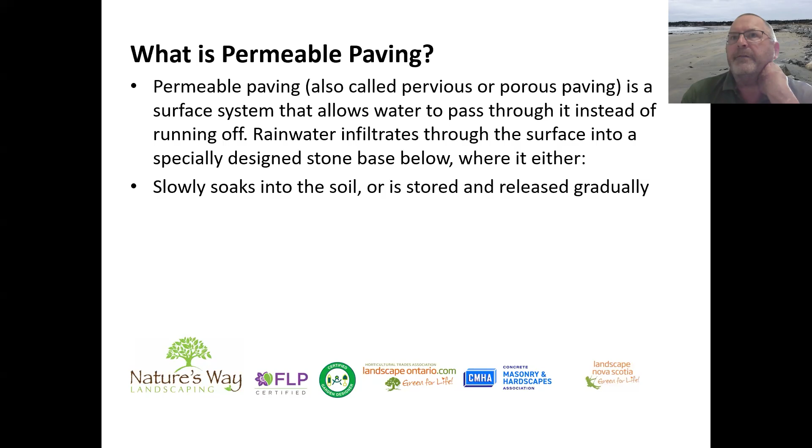So permeable paving is very technical, very abstract, very individual. There are certain rules because everything's governed by physics, but it's also something that can be experimented with, and we experiment all the time with permeable paving.

Permeable interlocking concrete pavers - I teach this for the Concrete Masonry & Hardscapes Association, the old ICPI. It's the most common in residential and commercial landscapes. As it says, it replaces traditional interlock. It can be used on parking lots, walkways, driveways, patios, ground level raised patios. It's very easy to incorporate PICP into your designs. It's durable and easy to repair.

There's no difference between the units classified as permeable versus regular interlock. The units are exactly the same; the difference is whether they have spacer bars on them. The designated permeable pavers have a bigger bar, so the gap is wider. And it's that gap that dictates the infiltration rate of water going through between the pavers. Your jointing material between those pavers will also affect that infiltration rate.

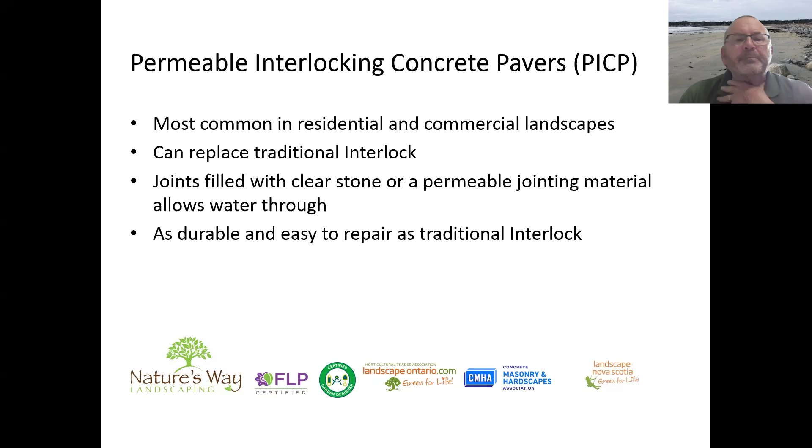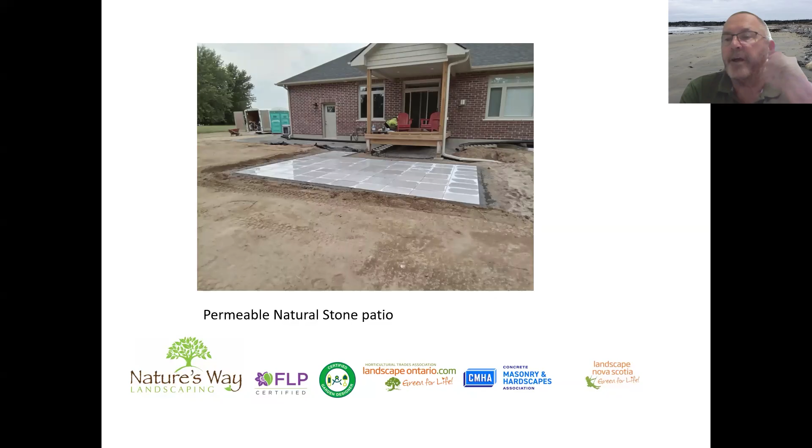So this patio looks just like a traditional patio. We had the nitro in there as the jointing material, so it's a full infiltration project, but it doesn't look like what everyone would think of as a permeable patio.

Barry, there's a question that asks, is there a jointing material you would recommend? Is there an edging material I'd recommend? A jointing material that you would recommend? Jointing - it depends on the application.

Out of the two that I mentioned, the Romex and the Gator, I've only used Gator. It works great, but it's very expensive, and the Romex is very expensive too. We've used number 9 or 1/4-inch chip a lot of times, and it's a lot less expensive, but it's also not as attractive.

I have it at home, so you get little bits of limestone laying on your pavers after you've weeded, that type of thing. So the maintenance is a little bit more because with the clean stone you will get weeds germinating. It's hard for weeds to germinate with the Gator and Romex products, so it's much easier to keep clean. But again, it depends on the application.

So this screen here is just a regular large slab on a full infiltration base. Again, we use the nitro in there for the jointing material, so the water just flows right through. This is actually where I'm taking the picture - behind me is Lake Ontario, or the St. Lawrence River, so the water just goes right down and back into the river.

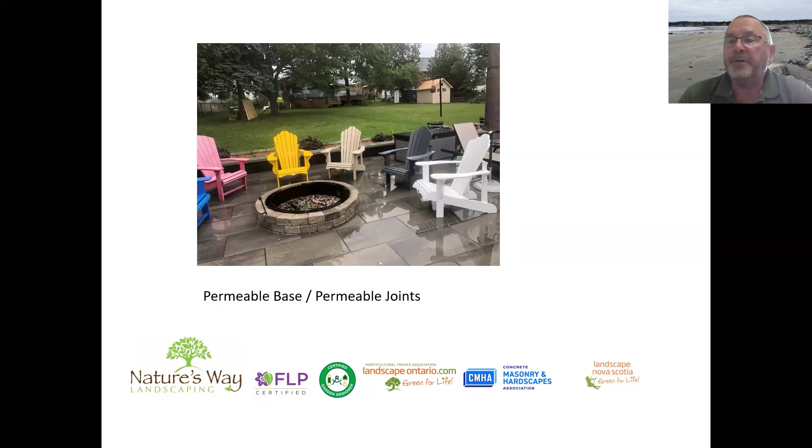What base did you set that on? It's on either 3/4-inch or 7/8 clean limestone. Okay, so it's a clear base - there's no fines in it.

This one - just as an aside, we did a little patio behind this house. The St. Lawrence River is behind this house, it's a different property, and again it's a full permeable patio. It's about 30 feet long, 5 feet deep. It's flagstone, again, with a permeable jointing material between the slabs.

So when the water washes up, it just goes right back into the river, because with the height of the water right now, it is lapping over. The client knows that where there may be an issue is that the jointing material may get washed out. Flagstone won't go anywhere, but it may need to be reapplied.

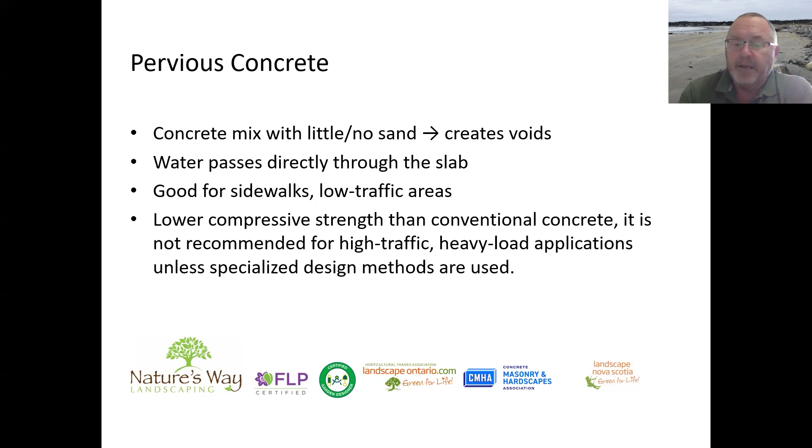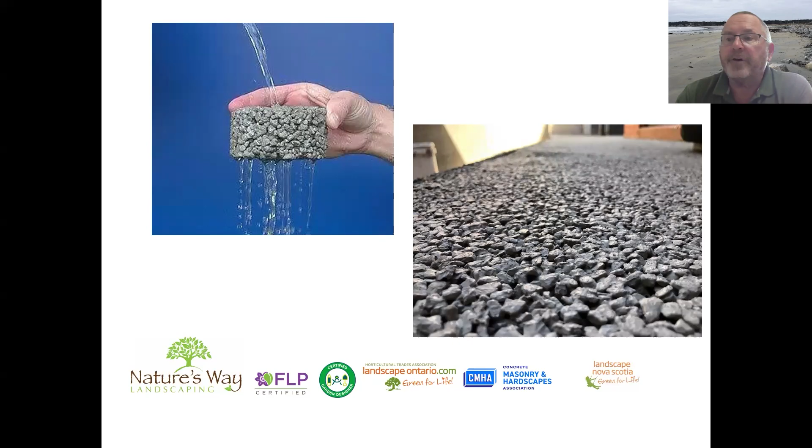Porous asphalt is very similar - there's a lot less of the fines, a lot less of the binding material, the tar that binds everything together. That's because you have to remove something to allow for that movement of water through.

So when we replace a traditional base with clean stone, like a 7/8 clean stone, we've removed everything underneath that size. If you're looking at granular A and put it through a sieve, as the mesh gets finer you'll have less and less material going through until you get down to the fines. When all those materials are put together and you compact granular A, it's almost waterproof - it will shed water quicker than it allows it through. So we take all those fines of different sizes out, and allow the water to go right through the base.

They have to do the same with porous asphalt, because with porous asphalt and porous concrete, the water isn't going through joints. With interlock, with permeable interlock as I said earlier, the stones are exactly the same - same compressive strength and everything else. It's the joints that allow the water through, so to increase your infiltration rate you have a wider joint and a more open graded jointing material.

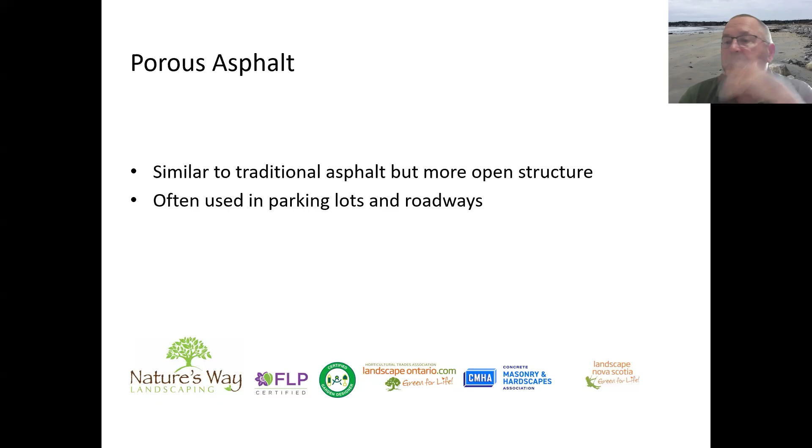It depends on where you are and how you're doing it. I don't like to use product placement, but there's a triaxial grid made by Unilock. You can get a regular triaxial grid as well, it's just easier for us to get it from Unilock. That allows you to put about an 8-inch base in a driveway.

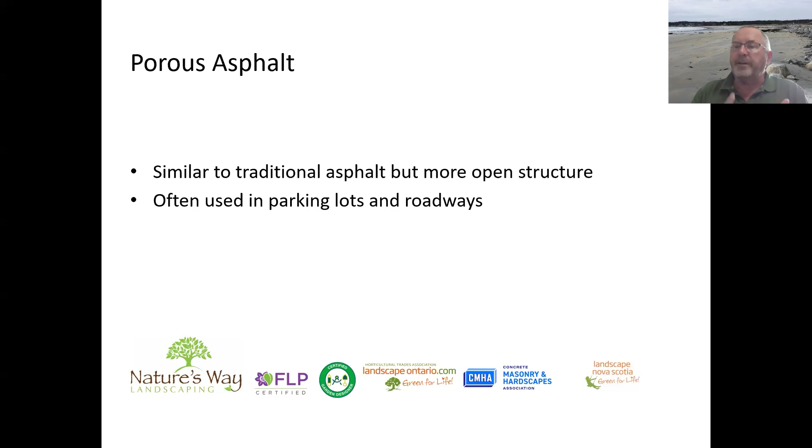What the triaxial grid does is stop a lot of the depressions and movement of anything that you get with your traditional base. Normally we'd do anywhere from a 12 to an 18-inch, maybe deeper base for a driveway. We'll spend the extra money and get a triaxial grid on there, and then we can do it with a traditional depth of base. We'd have to do that with asphalt, concrete, or interlock. That process is exactly the same. Okay, perfect, thank you.

This is basically the base layer, and then you put another layer of asphalt on top, which only has stone dust in it and the bindings, so it's a much smoother finish. Although it wasn't porous asphalt or pervious asphalt, it looked like that, so all you see are the big stones. It just, I'm sorry, but it just doesn't look right.

And when you consider that what we're doing is just making a place for people to live so much nicer, so much more practical - there's no way you can do any repairs here with either of these. If there's a problem with a water pipe underneath, you have to cut it. You can't lift some pavers, do your excavation, and put everything back complete.

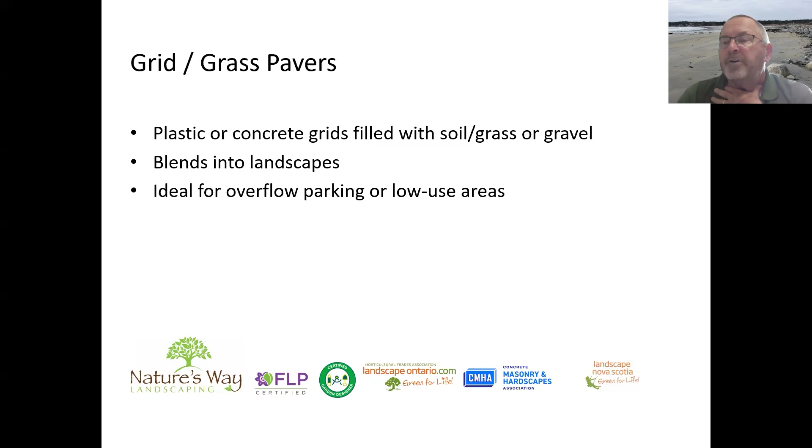So these do work. I have some friends that have put in the big concrete box with the void and planted it - they've had no issue when it's used occasionally and it's irrigated. They've got projects that aren't irrigated and the grass doesn't grow very well. If it's partial shade, or especially afternoon shade, you'll get much better growth of grass, because that concrete will absorb the heat from the sun and bake the soil, and your grass won't grow very well. But again, it's used for low use areas, overflow parking, shaded areas. It's another tool in the toolbox for us to use.

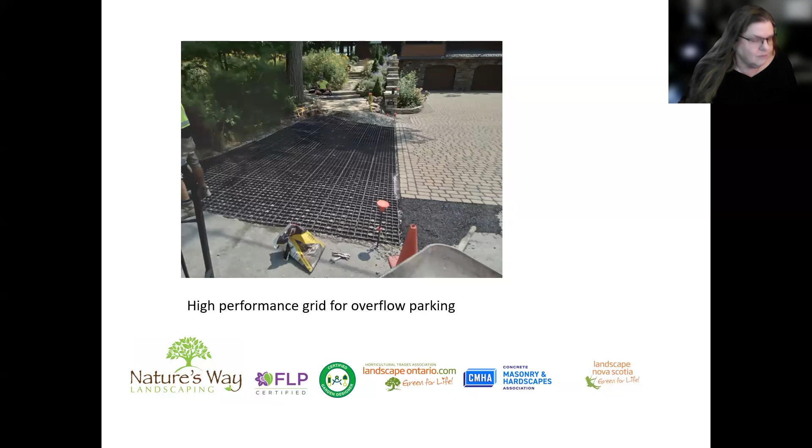Terry, can you tell me what grid system that was? Sorry, it's hard to find a good grid. I believe that was Unilock - I think Unilock have a grid. So I believe that was theirs. Thank you, it's hard to find a good grid system.

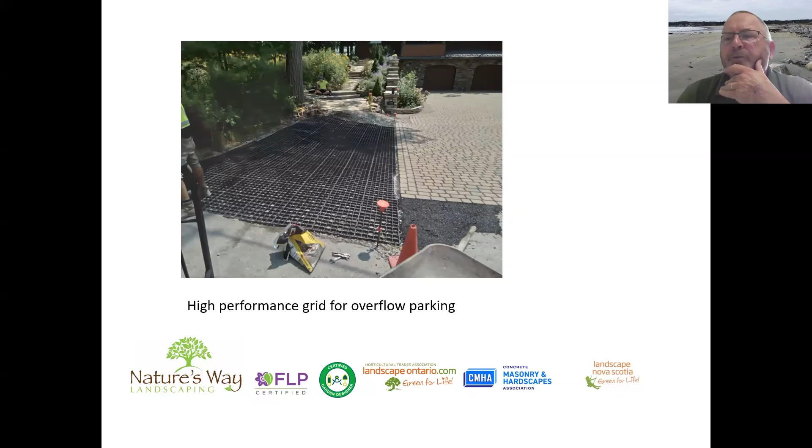Paul Dornbosch from Thornbush uses the one from Han Plastics. Okay. And I forget the name of it, but I know he's used it on a couple of quite large projects and been happy with it. Yeah. Okay, thank you. So again, these are pictures stolen from, I think, Deco Block.

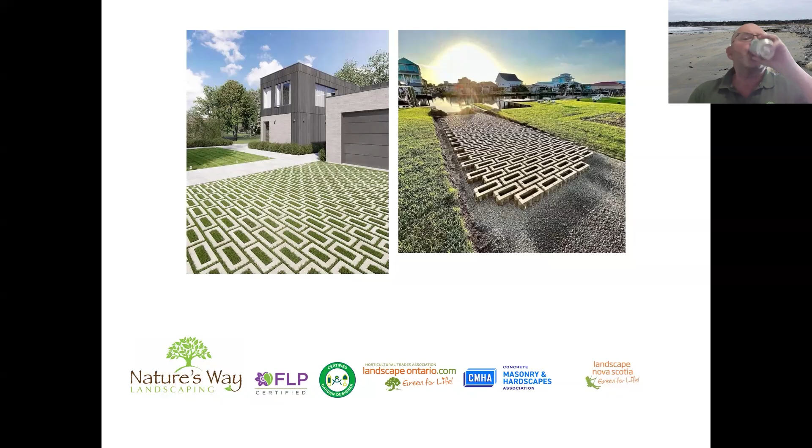I really do like that house. And again, this is a permeable option. To make it permeable, it has to be on a gravel base. And then you put the soil in and you put the grass in. So you are limiting the ability for the grass to grow correctly. But again, if you set it up right, you're good to go.

Theoretically, the grass in this could be synthetic. You would remain permeable. It would be finicky, but it's possible. So again, as long as you know the principles, experiment. Can I ask how that's going to handle if you put a synthetic in there? Is it snowblower worthy, since we're all in snowblower area?

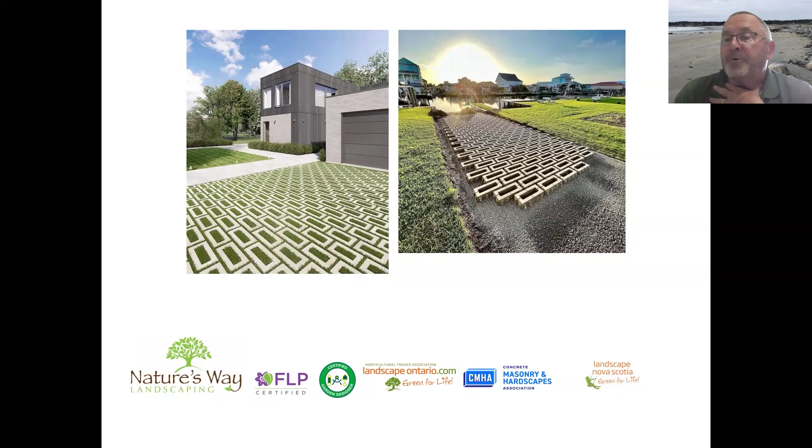It should be, because you'd have to be fastening the synthetic down. Yeah. So you'd be stapling it down anyway. Right. That's why it's finicky. Yeah. So yes, it should be snowblower friendly. Or it'll definitely be snow shovel friendly, which younger people would relish because it's good exercise.

Or you could just move somewhere where it doesn't snow, like BC.

Optional extras that aren't usually thought about: flagstone. It's again, everything that we do. We're doing a project next week. We did a patio last year, a fully permeable base, but not a top. We're doing a continuation of the walkway out to the driveway next week. And again, it'll be on a 3/4 inch or 7/8 clean limestone base with a 1/4 inch chip bedding layer.

We are putting the same stone as a patio in front of their garden shed, and it will be on granular A because we actually have to have it raised above grade. Clean stone has to be fully encased because there's nothing to stop it moving. As soon as you come above grade, you have to use the granular A. And then that way you can have the sides sloping out, that will hold it in, and then you can bring in mulch or soil or something to dress it up.

So again, it's the base that's creating the permeability. And if you look at the numbers, it is cheaper to use a permeable base, a 7/8 or a 3/4 inch clean stone base. Another option is resin bound driveways, walkways, patios. It's extremely common in the UK and it's getting more and more common almost daily because it works so well.

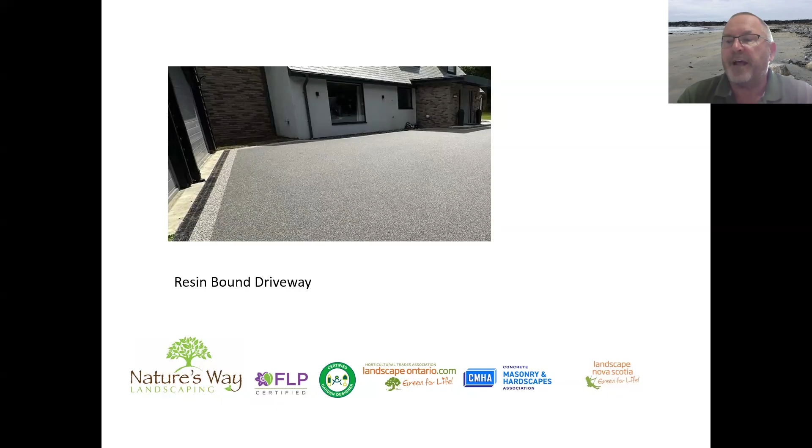So this is a resin-bound driveway from the UK. So you can see you can be really creative with it. You can have sailor or soldier course edges. You could have a different color resin. This has, I believe, a sailor course of interlock, and then there's a course of a lighter colored stone, and then the main body. So you can be creative with it, but again, my concern is its ability to withstand the frost movement.

Oh, someone just had a question about Pure Pave. About who? And I have used Pure Pave. Have you used Pure Pave before? Yeah, I think it's Pure Paver. Yes, because the paver itself is permeable. Is it Martina who's asking? Martine, are you asking about the Pure Pave? Yes, I am. Thank you. Thank you, Lexi. So, are you thinking of Pure Pave or Pure Paver?

Well, Pure Pave is this resin-bound gravel system, and apparently has been tested by the National Research Council and the University of Ottawa here in this area. But I'd like to know designer and landscaper experience apart from what they claim. Has anybody put it in? No, I haven't. So that's what Samantha would have used. It may not have been Pure Pave, but it's like a resin-bound stone. Just because something has been tested by the National Research Council doesn't mean anything, because you can pay them to test anything. But have they shown you the results? I think so. Okay. So it may work. Those would be my concerns, the frost movement.

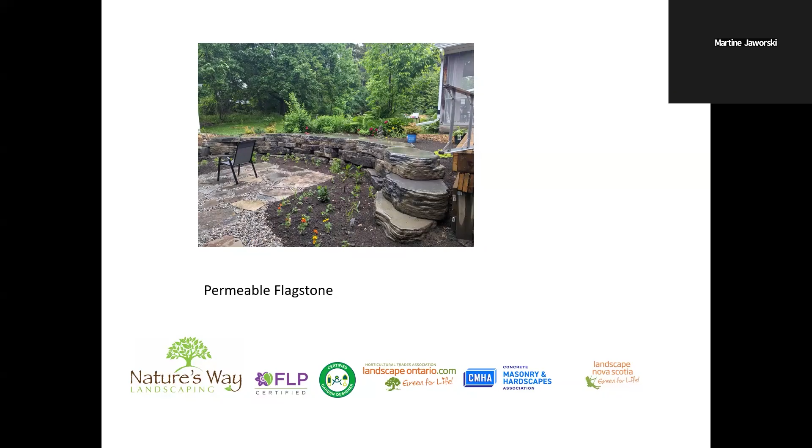But check with the supplier, the salesperson for the supplier, and find out what the Research Council said and where it was tested. They have the labs in Ottawa, and they may have tested it inside but maybe not outside, or they may have tested it outside somewhere else, because Ottawa does get some nasty frost movement. But definitely check with the supplier and see what kind of guarantee they use.

I know the first time I used Gator Base, the thin polypropylene base, it was for a 15 by 15 patio, and I was able to get a commitment that if we got movement in the first few years, they would pay me to remove it and do it the traditional way. It never moved. It still hasn't moved. Pam from Simply Landscaping has it in her back; that's what her patio's on. As far as I know, it still hasn't moved, and it's been years. But again, check with the manufacturer and see what they say. And if you have concerns, see if they can give you the reassurance that you would need.

This picture is permeable flagstone. It's only permeable because, again, it's not the materials that we use in. The flagstone itself won't let the water through, but the gaps in between. And this is just 3/4 inch clear stone as a base, we put a 10 mil bedding layer on it. We put the flagstone on, and then we put 3/4 inch river stone to provide the joints.

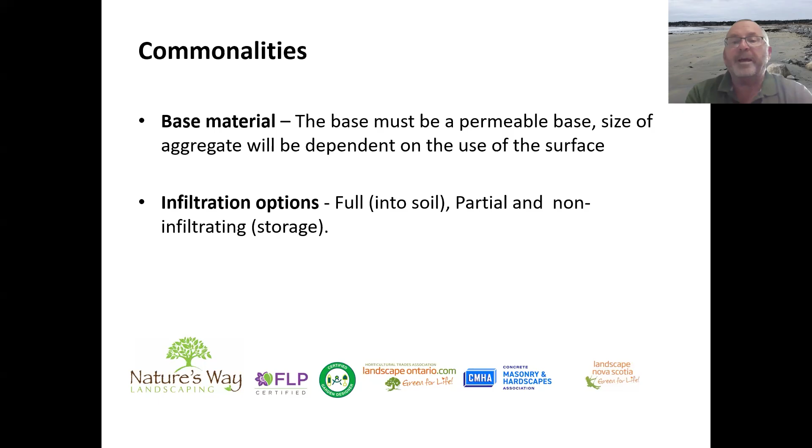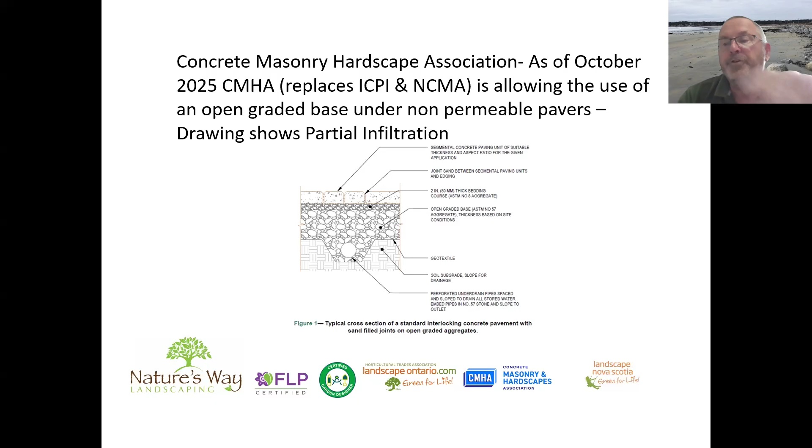Infiltration options: full infiltration, which is where any water going through the joints will actually go into the soil after it's sat in that void, which is the base. And then there's partial and non-infiltration options. So, sorry, it was October of 2025 that CMHA is allowing the use of open graded base under non-permeable pavers. And there again, they have an under drain to take any extra water out if it doesn't go into the subgrade.

This is full infiltration. So again, there's no drainage pipe in this one, and the water is just to go into the subgrade. If you're trying to infiltrate, do not compact the subbase, which is what I'm telling people to do if they're doing interlock. Compact the subbase. If you're doing infiltration, don't compact it unless you're in sand, which you can't compact anyway. But as soon as you compact that clay layer, you've just created a flower pot, and the water will not go out. We have to remember, permeable is not for everywhere.

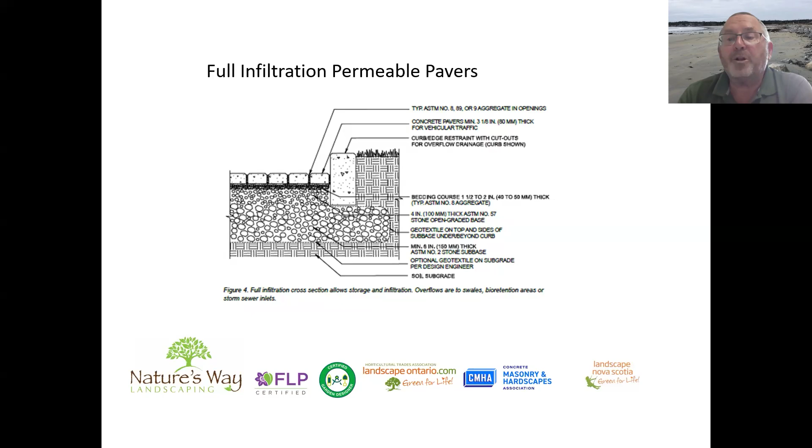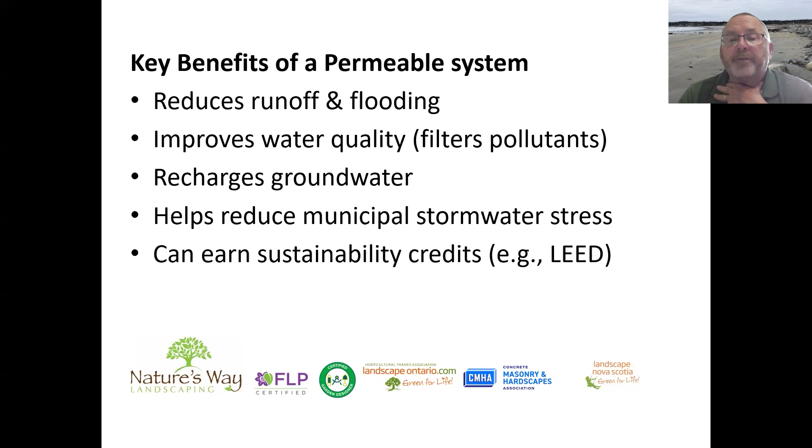So key benefits: reduces runoff and flooding, improves water quality because it really does filter pollutants. And not just what we've created, but the fact that we're putting it into our base and then it goes into the sub-base is what really improves the water quality. Recharges the groundwater, helps reduce municipal stormwater stress, and on commercial projects, you can get LEED credits. Why it matters: urban flooding issues, stormwater management, environmental protection.

There is a subdivision, I believe it's in Credit Valley Conservation area. The developer was allowed to not have a big drainage pond because he was going to put a permeable driveway on every property, which then allowed him to use that space for the stormwater pond, put more houses, which made him a ton more money even after putting in all the permeable driveways. So again, it's thinking outside the box.

It's something that when interlock was first done, it was a semi-permeable base just because it was smaller pieces of rock that were broken up before they put the bigger pieces of rock on it. So, it's not brand new, but we're adapting all the time. And as designers, the one thing that we have that a lot of other people don't have is an imagination, and it's utilizing that imagination.

So as Samantha did, she had several areas of the resin bound, and it's working in some, and it's not working in others. And when you do your designs, you work out the pros and cons of doing things. This is what we need to do with permeable. Environmental protection. What permeable pavements are doing is really making a difference in environmental protection.

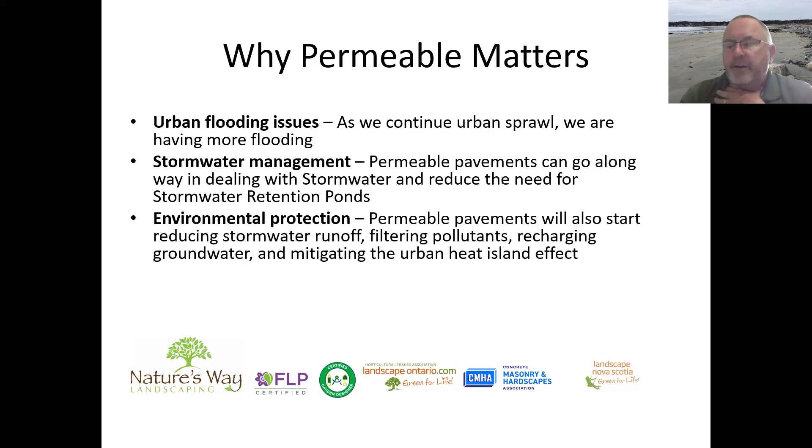Key disadvantages of permeable pavement. I forget where I got this quote from, but installation is 50 to 100% higher than conventional paving due to specialized materials. When I teach the permeable course for CMHA, I teach a commercial course. That cost, if I did a commercial project, it's probably going to be 20 to 30% higher than traditional, only because when I'm doing it, I have to keep all the materials separate.

I have to keep them clean. I have to put any of my gravels on a clean geotextile so they don't get contaminated. I can't allow any contaminated materials on top of the base. The specifications are very stringent on bringing any kind of organic material in, any kind of clay, any kind of non-pervious materials in, because they want to keep it as clean as they can.

So staging becomes more expensive, and the processing itself becomes more expensive. But that's not for what the majority of us are doing. We're doing driveways, walkways, mostly residential. And even commercial, we can do commercial if it's smaller areas where we don't have the expense you'd have in a traditional municipal permeable project, because they want to keep it as clean as possible, and we don't need to.

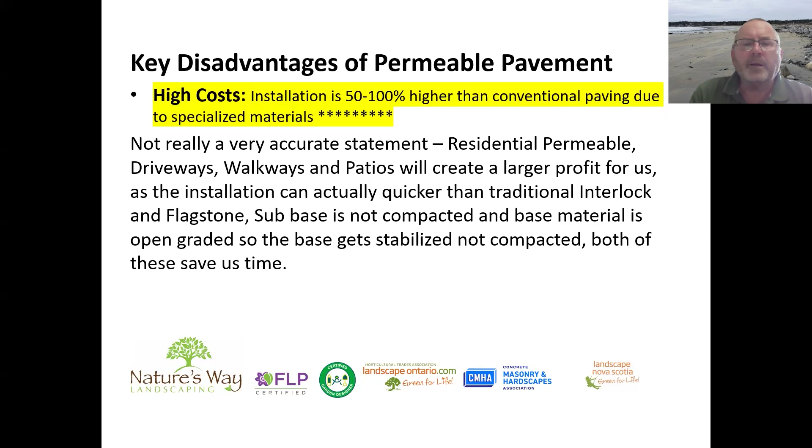Maintenance requirements of permeable pavement are quite different. It's prone to clogging, yes it is. Again, depending on how you finish it, my permeable patio at home has quarter-inch chip in it. I'll use a pressure washer and blow it all out. Eventually I blow it onto the lawn, rake it in, and it just goes into the soil, which is where it came from originally. I don't have big piles of it. Then I'll put more stone in there, because leaves break down and dust gets in there.

You can vacuum, you can use a shop vac to suck out the gravel and the pollutants that are in the jointing material, and commercial vacuums for larger areas. I know a lot of conservation authorities and municipalities will have the commercial vacuum go through and suck everything up, and that really does keep it clean. You just have to reinstall that jointing material in there.

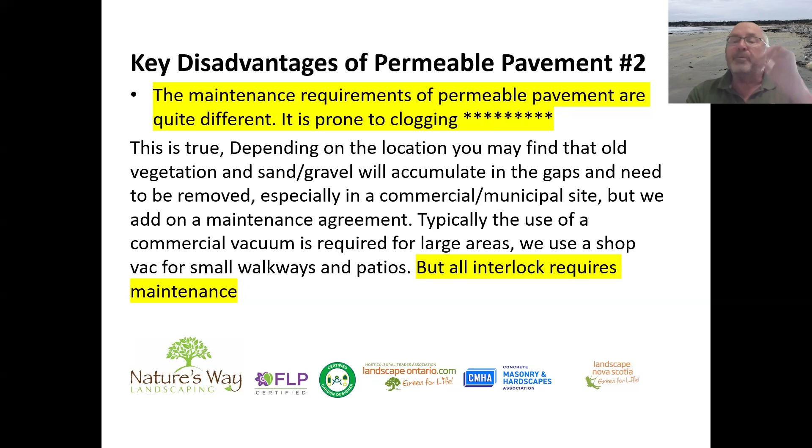So it is a negative, but we also have weeds growing in interlock because people aren't keeping the interlock maintained properly. The number of clients that say, make sure you put that plastic stuff underneath so the weeds don't grow up through. Well, it's the weeds growing down that's the problem, not weeds coming up. So both options, permeable and non-permeable interlock, have maintenance. It's a fact of life. We have maintenance. I used to say we can put plastic flowers in to reduce or stop maintenance. I had to change that to reduce, because even plastic flowers apparently have to be dusted occasionally. But I'm a man, so I don't see dust.

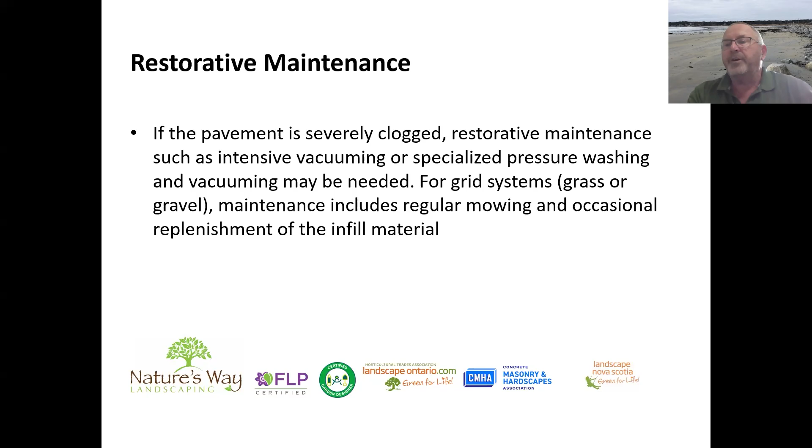Restorative maintenance, again, can be a problem if we're not doing maintenance. But it's no different than anything else - if we're not looking after things, the need and cost of that maintenance is going to increase.

I'm still waiting on Courtney from Landscape Ontario to get all the information out there. But the city of Ottawa is subsidizing, and I believe Durham is doing some subsidizing. So it's something municipalities are starting to understand. I don't think it will be long before insurance companies start to do the same thing, because if we can put permeable or fusion elements in places, we're mitigating flooding issues and other things. So it's definitely becoming important.